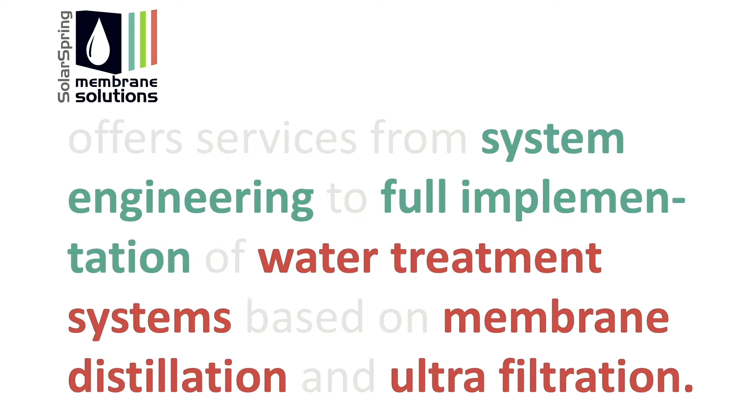The second company, tackling the water topic, has a similar scope. They also offer services from system engineering to full implementation of water treatment systems, and their core technology is membrane distillation and also ultrafiltration.

So then we come to the full scope of services of both companies. It starts from consulting services concerning CO2 reduction, energy efficiency measures, energy optimization, via engineering. So we can offer engineering services for heating and cooling systems, direct steam generation with solar energy.

When it comes to power generation, we of course do offer a photovoltaic system, but not only the regular flat PV on the rooftop, but also new technologies like solar fences or photovoltaic carports.

We're coming from the heat sector, so we can offer EPC construction of heating, cooling systems, solar process heat systems with concentrating solar thermal, but also complementary technologies like heat pumps or chillers and storages. Last but not least is the water sector, process water treatment and resource recovery with the technology of SolarSpring.

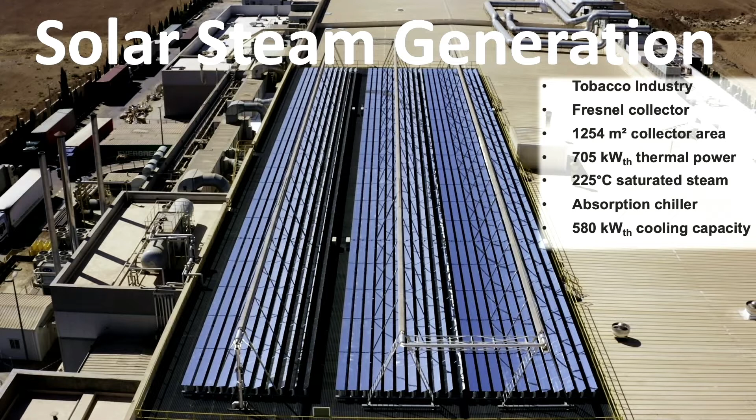That's how it all started with the Fresnel collector. Actually, I'm in solar energy since about 30 years, and we were doing consulting for power plant companies. And we realized that industry has a tremendous heat demand, and we decided to adapt power plant technology for industrial application. And that's how we then designed this so-called Fresnel collector.

Here you see a photo of a system which is installed on the rooftop of a tobacco factory in Jordan, in Amman. This system has a thermal power of about 700 kilowatts and delivers steam at 225 degrees C.

In general, I would like to emphasize that the majority of people think that we only need renewable electricity and then our problem is solved. But as a matter of fact, heat or thermal energy is responsible for a very large fraction of our fossil fuel consumption. And this has to be addressed, especially in industry.

And this leads me to the background of our activities. The hard facts: 50% of all emissions are caused by the combustion of fossil fuels to generate thermal energy. 50%. And 30% of all emissions are caused by industry. This is as much as the complete transport sector, as all cars, ships, planes together are causing emissions. So industry is a major culprit in this regard.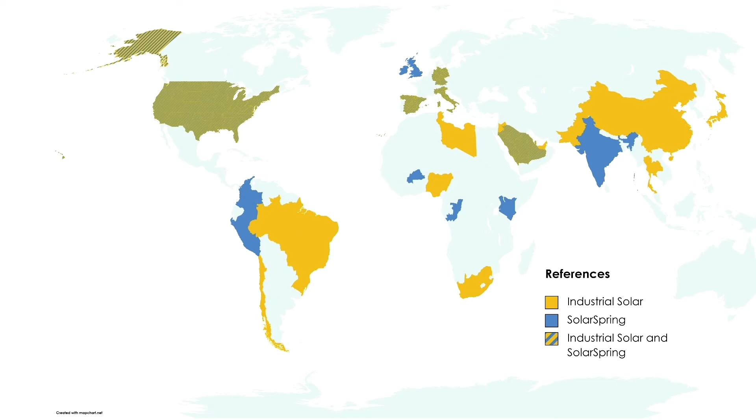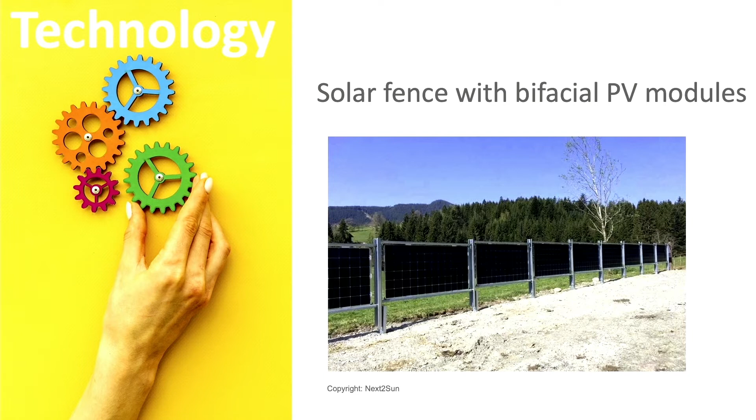Some examples of technologies that are not so commonly known. Many companies already have photovoltaic on the rooftop, but the rooftop is already covered, with no further area available. So here, for example, we can offer solar fences.

These fences use so-called bifacial PV modules that generate electricity when they receive or absorb solar radiation from the front or the back side of the module.

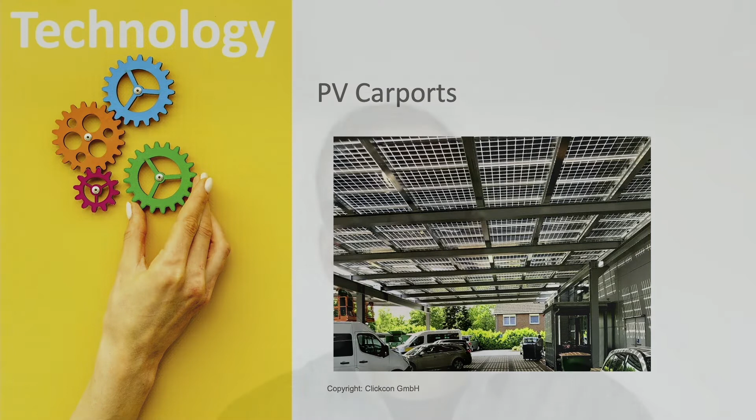Another technology that is also important for industry with no further available rooftop area is PV carports. There you get shading for your cars or trucks, protection from rain, and at the same time you can generate electricity to charge your vehicles or to supply electricity to the factory.

Now I'm coming back to our flagship technology, the Fresnel collector. Here you see the principle. It's a linear concentrating system. Those primary mirrors are uniaxially tracked. They are concentrating the solar radiation onto a so-called vacuum absorber tube.

In this tube, different types of heat transfer fluids can be circulated: pressurized water, meaning water under pressure so that it does not evaporate, or steam, so we can partly evaporate the water in the absorber tube and provide steam. Or for higher temperatures, we can also use thermal oil, with which we can reach temperatures of up to 400 degrees C.

This absorber tube was designed for power plant applications, is very efficient at high temperature because it has very little heat losses. It's a modular solution, designed for a power range from, let's say, 500 kilowatts to double-digit megawatts. It's big enough to meet the energy demand of industry, and small enough to be installed on large flat rooftops of industrial buildings.

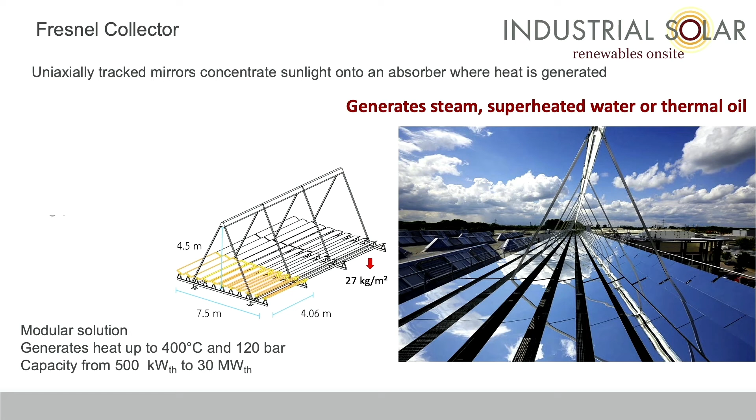Integration of this technology is very simple and straightforward, especially with steam. The solar steam generation system generates steam and injects it into the steam grid of the company. Basically, when the set pressure is maintained by the solar steam generation system, the fossil-fired boiler does not start firing, and fossil fuel use and emissions are reduced.

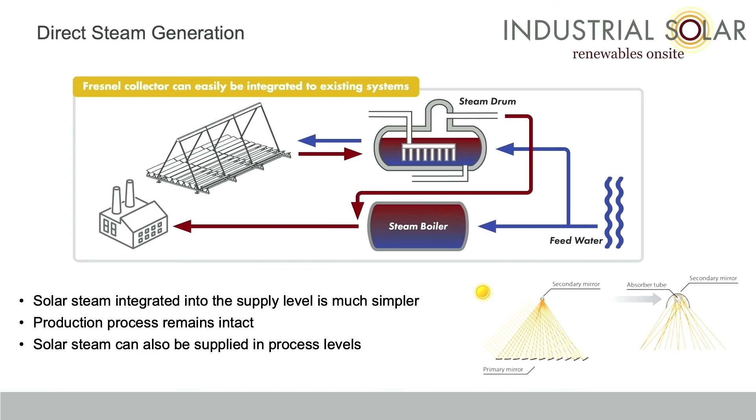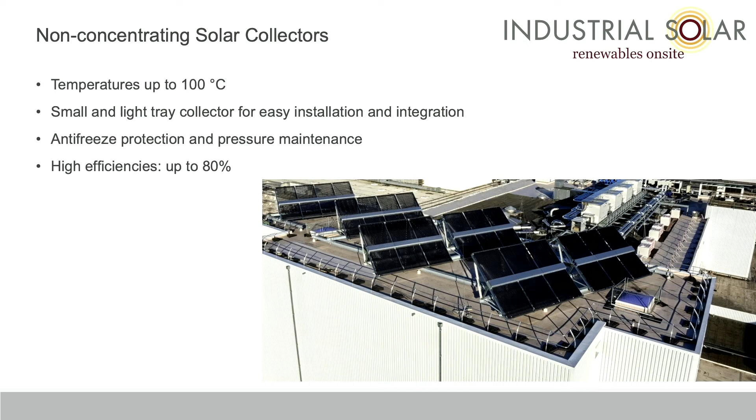They have basically an integrated freezing protection and also overheating protection, because with air as heat transfer fluid, there is no problem with freezing or overheating. They have very high efficiency, very low latency, so that's a very interesting system for hot air applications.

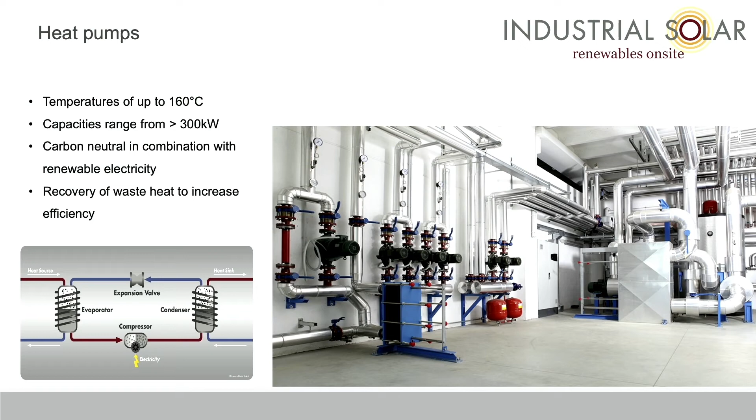Last but not least, another example of technologies engineered by our company Industrial Solar are heat pumps. Heat pumps are currently being developed for higher and higher temperatures for industrial applications. In the private sector for space heating, they already have a rather large market share. And there are now new heat pumps available that can generate higher temperatures, up to 160 degrees C, eventually even more in the near future. This is, of course, one important technology to cover the heat demand in industry.

Now let me show you a couple of slides from our other subsidiary, SolarSpring. Their core technology is membrane distillation. You all know this if you have an outdoor jacket with a membrane, like Sympatex or Gore-Tex. Basically the hot feed solution evaporates through the membrane and then condensates on a condensation surface.

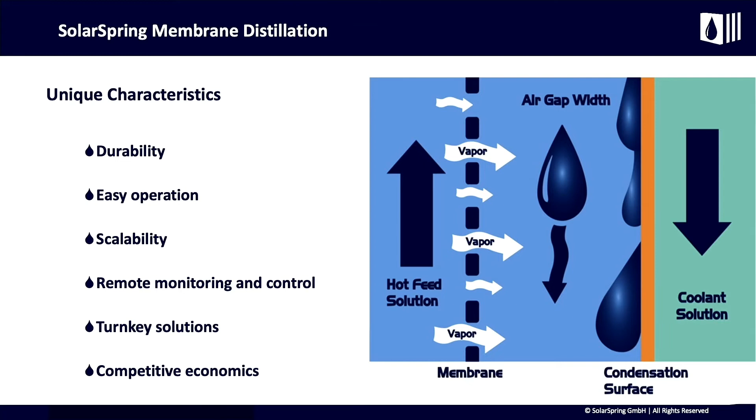What are the advantages of this technology? It's a very durable technology, very easily operated. It can easily be scaled, and it can be used for many, many applications. It has competitive economics, and it can be used, for example, in the metal industry to recycle acids, to recover valuable resources like gold in the electronic industry or nickel.

It can also be used for brine treatment. A lot of industrial wastewater streams are contaminated with salt, so it's possible to extract salt from those wastewater streams.

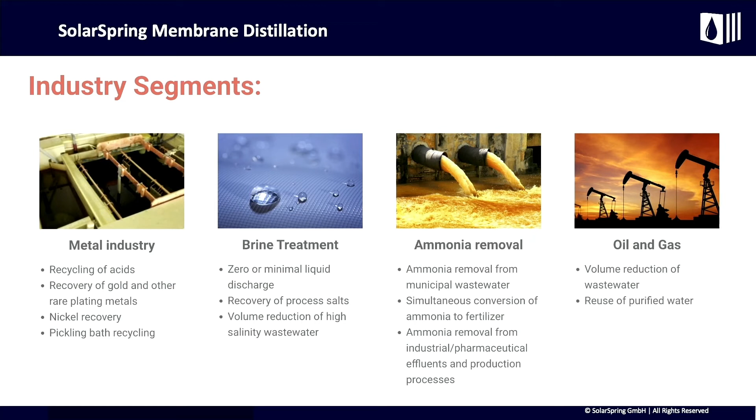Another interesting application is ammonia removal from wastewater treatment systems. Ammonia is also a kind of new fuel in the future, together with hydrogen. So with membrane distillation, ammonia can be removed from water that leaves wastewater treatment systems, and this ammonia can be used as fuel, and it prevents ammonia from acting as a fertilizer that causes plants in the water to grow.

Membrane distillation can also be used in the conventional fossil sector. For example, it can be used in the fracking sector to reduce wastewater and purify the water again.

Let me come to our current issue of units. We're currently carrying out a rights issue of units with a volume of around 23 million SEK. Each unit consists of one new share and one warrant. The subscription price is about 1.5 SEK per unit, corresponding to 1.5 SEK per share. The warrants are issued free of charge, and we have received underwriting commitments of about 65% of the rights issue. For further detail, please see the memorandum on our website.

So why are we an interesting case? Why should you invest in us and support us? We are addressing a global market with tremendous growth, not only growth potential, but real growth. We have a very strong order intake. Like in last month, we had an order intake of around €1 million.

We're seeing huge demand for green tech solutions currently due to the climate crisis, and the war in Ukraine is accelerating the replacement of fossil fuel. There are many new regulations and guidelines on the way, of which our company will benefit. Commercial buildings have to have renewable energy systems, and we can provide systems tailor-made. We are well positioned and offer good solutions for customers that want to become green and reduce their emissions.